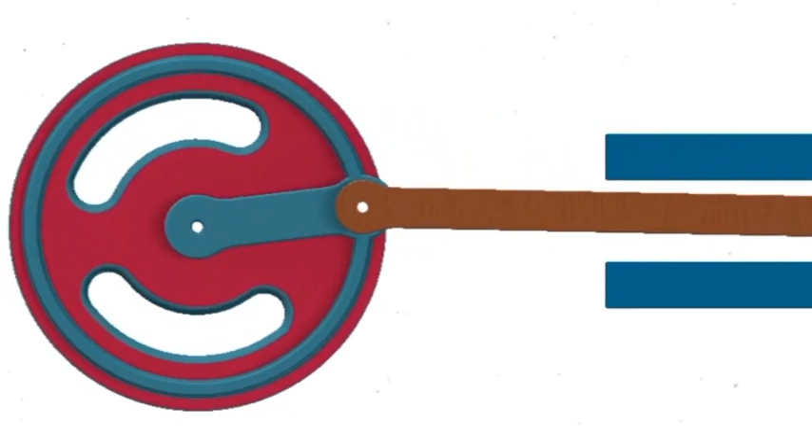A slider crank mechanism is used to convert a rotational motion into a reciprocating motion, and vice versa. This mechanism is composed of 3 important parts: the crank, which is a rotating disc; the slider, which slides on a fixed plane; and the connecting rod, which joins the crank and the slider.

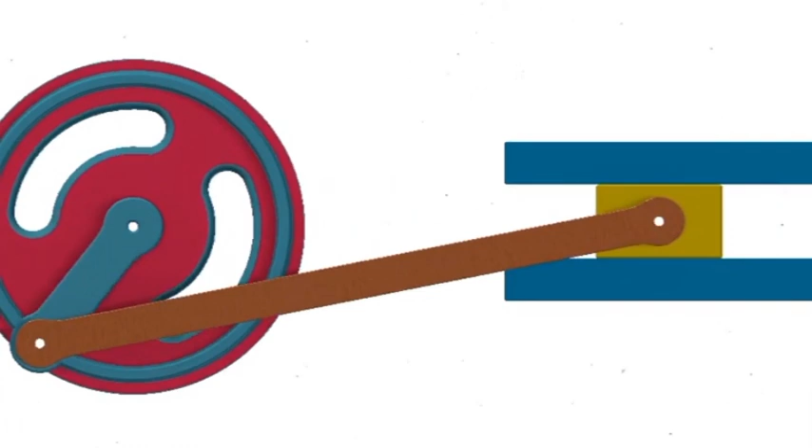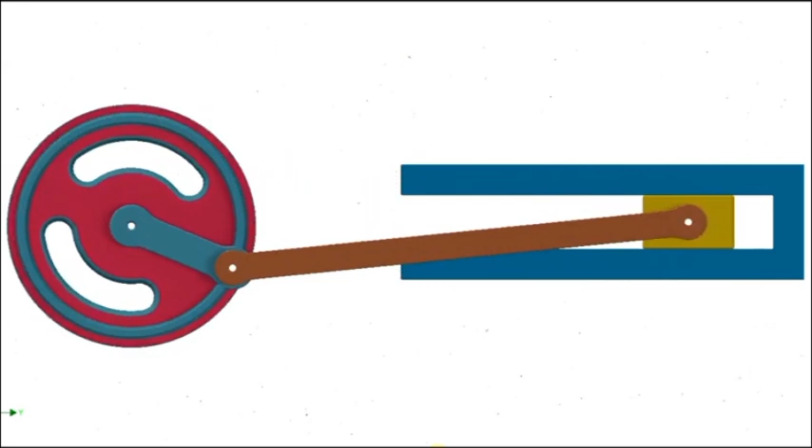This mechanism is a kinematic inversion of a 4-bar chain, with 1 sliding pair and 3 turning pairs. The total distance covered by the slider between its 2 extreme positions is called the stroke length. This distance will be equal to double the length of the crank when the axis of crank and slider are in the same line.

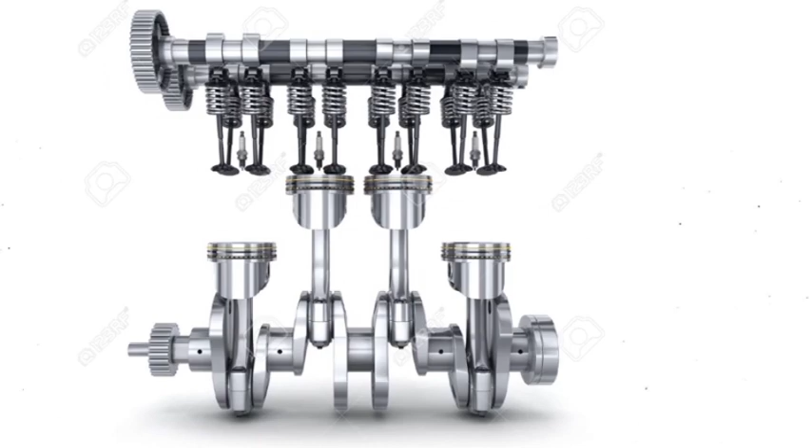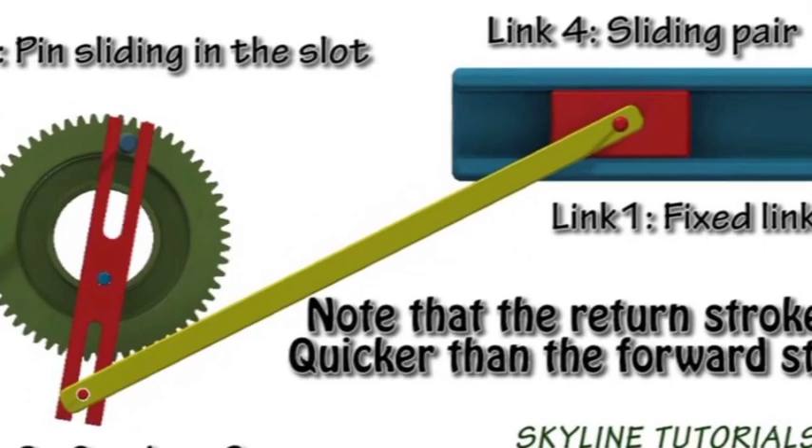Some common applications of slider crank mechanism are reciprocating engines, hand pump, Whitworth quick return mechanism, rotary engine,

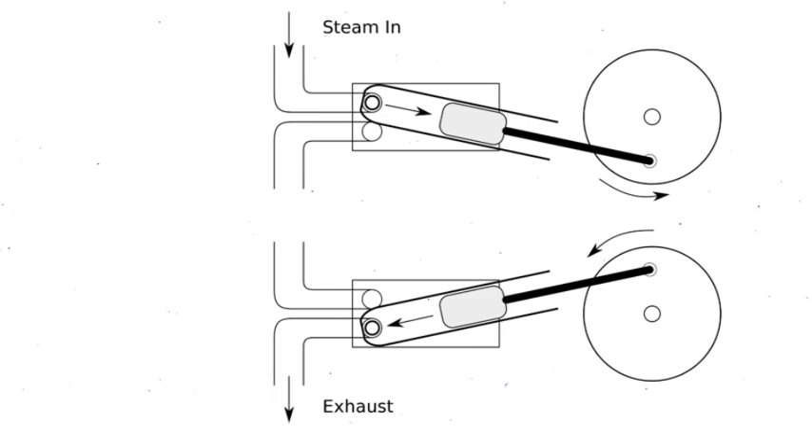slotted crank mechanism, oscillatory engine, bull engine, and reciprocating compressor.